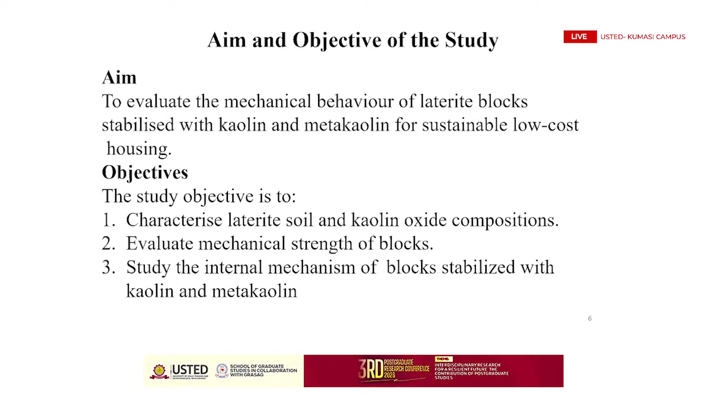Then finally, I will look at the internal mechanism of the block, to study what goes into the block as it's being molded with the stabilizers. So I went to the lab.

From what you can see, fig 1 is the laterite I bought, and on the right, fig 2, is my kaolin. We get the metakaolin from the kaolin; metakaolin is not a material on its own for you to go and get. So how do you get the metakaolin from the kaolin?

Researchers have proven that when you heat or calcine the kaolin to between 750 and 856 degrees Celsius, you get the pozzolanic content and it becomes metakaolin. But unfortunately, when I sent it to the Ghana Geological Survey Department, their oven did not have degrees Celsius. So you can see 1,472 Fahrenheit; when you convert it, you get 800 degrees Celsius.

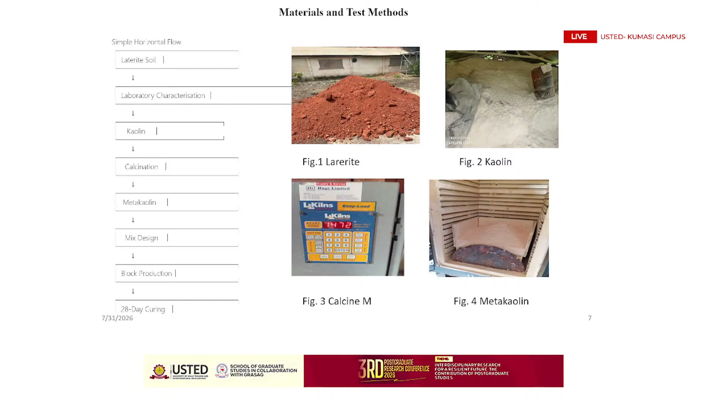Fig 4 over there is the metakaolin. So that's the difference: the kaolin is quite whitish, and after calcining it becomes a little darker, but finer. My work is experimental work, so I went to the lab. After going through the laterite, calcining the kaolin, and doing all the lab tests on all 3 materials, the laterite, the kaolin, and metakaolin, I did the mixing and molding of the blocks, and went through 28 days curing.

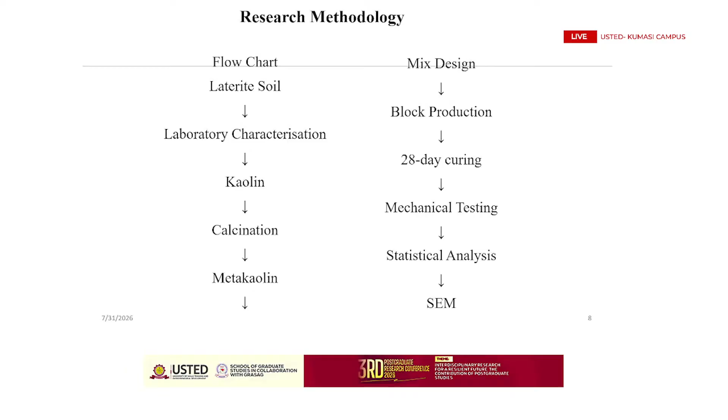I know the question might be, why not the secondary curing? This is part of my initial work. For the secondary one, I went to secondary curing, which is 120 days. Then after 28 days, I started the tests: the mechanical testing and statistical analysis. So basically, this is what I arrived at in the lab: the moisture content, the PI, the GS, the MDD, the OMC, and the free swell. All this laterite satisfies the grading requirement for stabilizing to improve engineering performance.

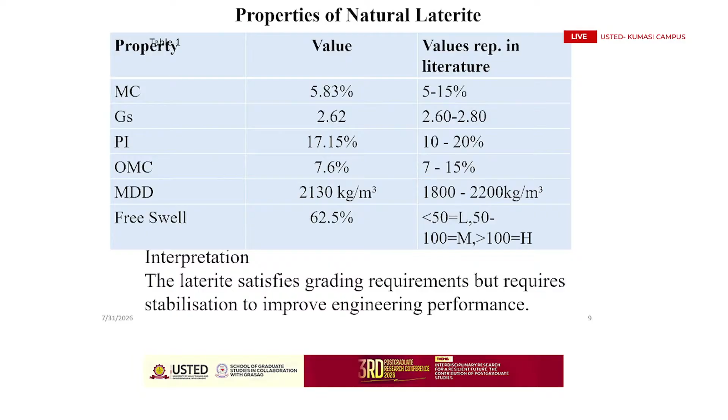I did molding of the blocks with the control, kaolin and metakaolin. My gap was to compare these in the lab with the same materials, as others did with different materials at different labs. I first did a trial test, which I didn't put here because of the limited number of slides, and the highest compressive strength fell at 10%. So I decided the stabilizer dosage should be 3, 6, up to 15, so I would know exactly where the maximum strength would be. I molded the blocks using the hydraulic press. That's the stabilized blocks in the shed, and that's one of the compressive machines I used for crushing at the Highway Lab.

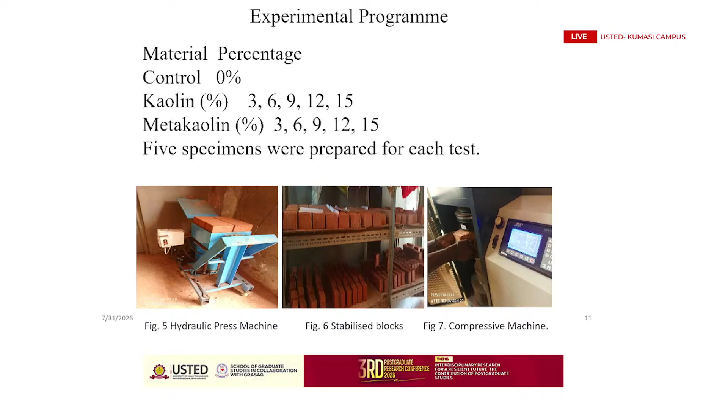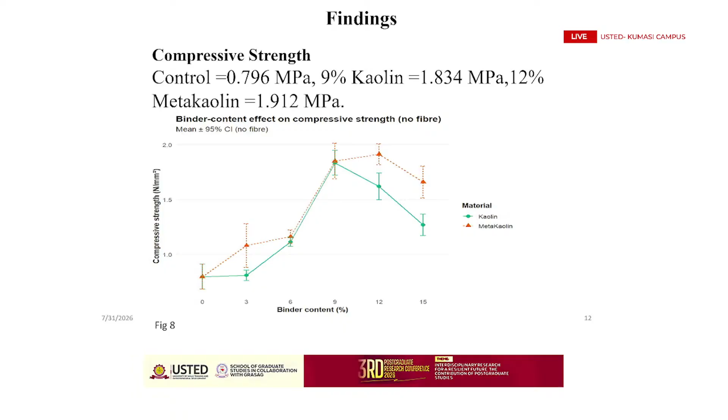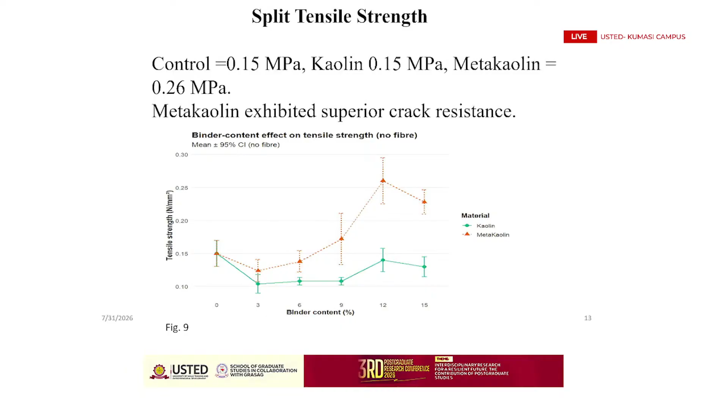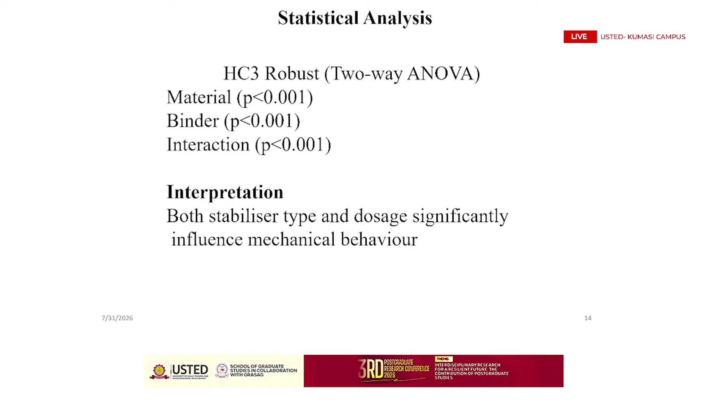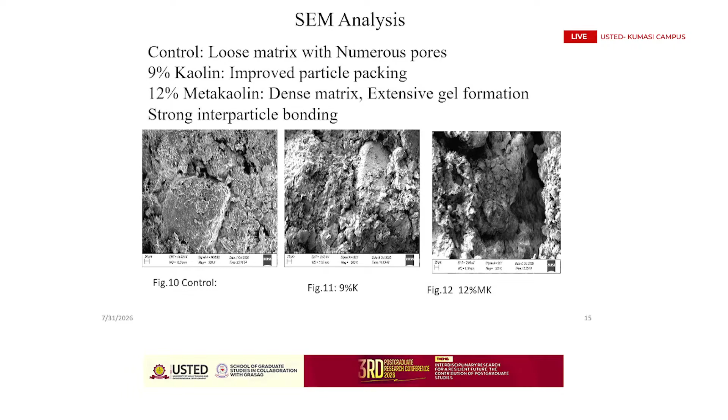It was shown over there too that the control has a loose matrix from the picture, as compared to 9% kaolin, which has a little bit closer particles, as you've seen over there. But metakaolin at 12% gave a denser block. That supports the argument that it gives a stronger block.

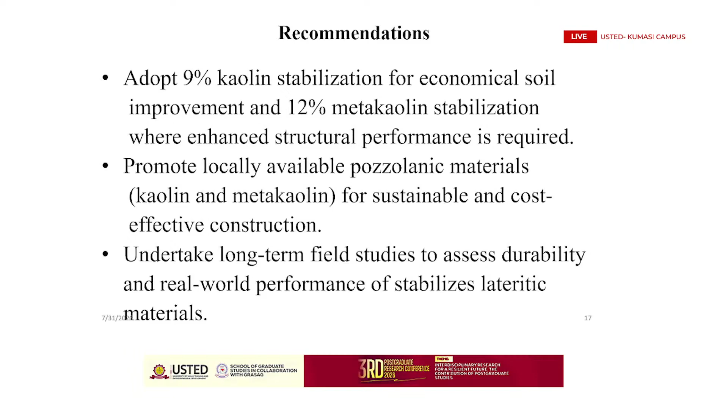But before I put the mic down, I continue to introduce fiber, which we'll talk about later. Thank you.

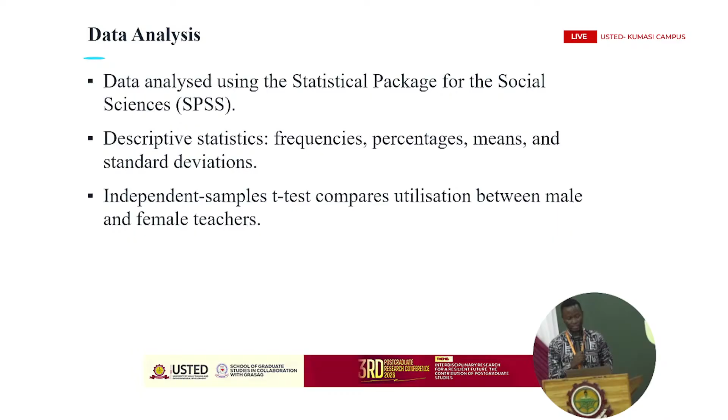So this is how the information will be analyzed. I'll be using SPSS, and descriptive statistics: frequencies, percentages, means, and standard deviations. And then the independent samples t-test will compare the utilization between male and female teachers.